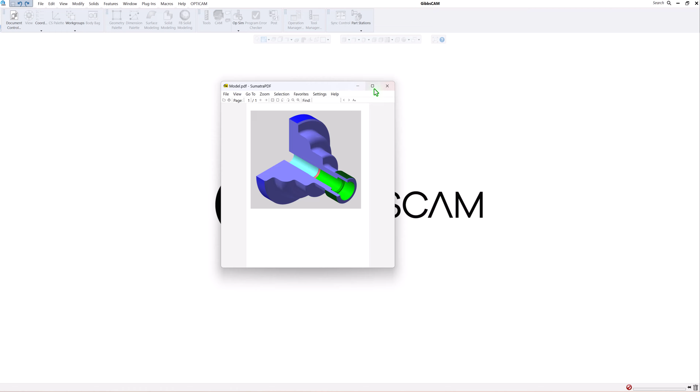This is what we're going to be machining today. Just a two-axis part with some ID turning and drilling and some threading. And this is the blueprint here for it, and you can download this off the details page on the YouTube, and to get started you can see all the dimensions in there for that.

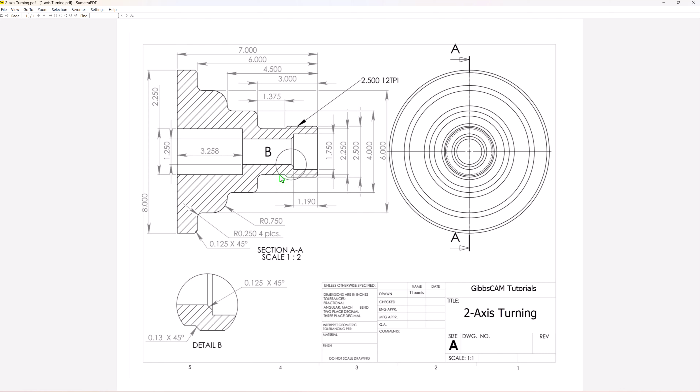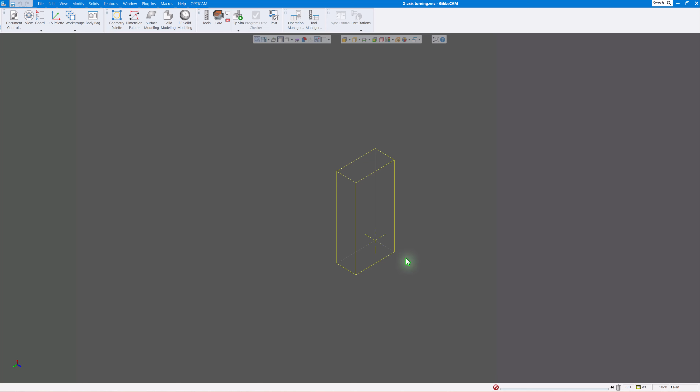So again, as we start working on this part, let's go up to File and New, and of course give it a name. We're just going to call this two-axis turning, and this should appear at the top of your page up here. Now, if the last project you did was milling, this is what you're going to see on your screen. It might be a little bit different on the square, but you're going to see a milling part here,

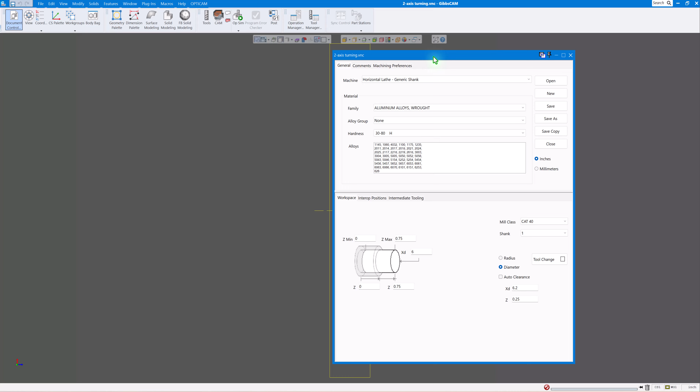which we don't want. So before you go any further, make sure you go to Document Control and click the drop-down menu. Let's scroll clear to the top, and we're looking for horizontal lathe generic shank. Okay, we'll just keep this at aluminum alloys wrought. You can see all the different menus here for material. We're going to program in inches, of course, and diameter. So make sure diameter is checked, not radius.

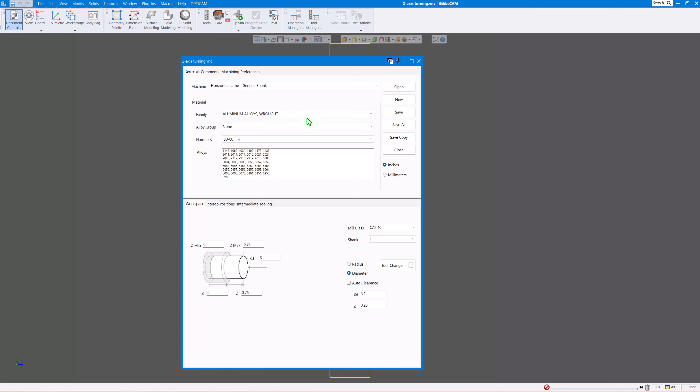And the shank we're using is a 1-inch shank. That's your stick tooling. You can see the different sizes here. The most popular is 1 inch, of course. And before we get filling too much of this out, let's take a look at our print so we can kind of do this as we're looking at the print. So now that we have the print up, we can fill out some of these blanks here and over here.

Of course, this does not have milling. This is just a two-axis turning part. So let's just click this first of all. Go down to None. Of course, 1-inch shank here. Now we have the clearance here and the Z clearance, but let's look at the part here first of all. So if we look at our print, you'll see it's 8 inches in diameter. That's the stock I want to use, so I'm going to put 8 inches in there.

And then how much material do we want the front of the face to face off? I'm going to give it 1/8 of an inch there. Okay, and our Z minimum, so basically the length of our part, you can see on the print, is 7 inches. So I'm going to say minus 7.125. I'm going to give it 1/8 of an inch on the back side as well.

Now we need to figure out how much we're going to grab onto with our jaws here, and if we look at our print, this is from 6 to 7, that's 1 inch, so I'm going to grab onto about 1/2 an inch of material, and if you figure there's still 1/8 of an inch material left on the back, 1/2 inch plus 1/8 is 0.625. So we're going to grab onto 5/8 of the part, and then we need to know how much material is sticking out past that part, so we can do a little bit of calculation here.

We know it's 7 1/8 inch overall from the back to the front there. And if we do a little bit of a calculation, we should have about 6 5/8 sticking out from the jaws to the front here. This doesn't matter too much on two-axis turning, but the visuals will be helpful on here, so we might as well get the numbers correct.

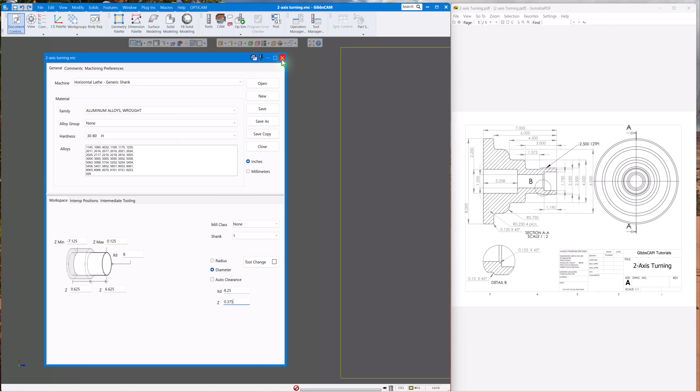And let's just do a no zoom there. And there is our part there. Now there's a couple ways to draw a part. We're going to draw this as geometry and not use a solid. The next class on the two-axis turning we'll be using a solid, and you'll see the big difference on using a solid and how much easier that is to use.

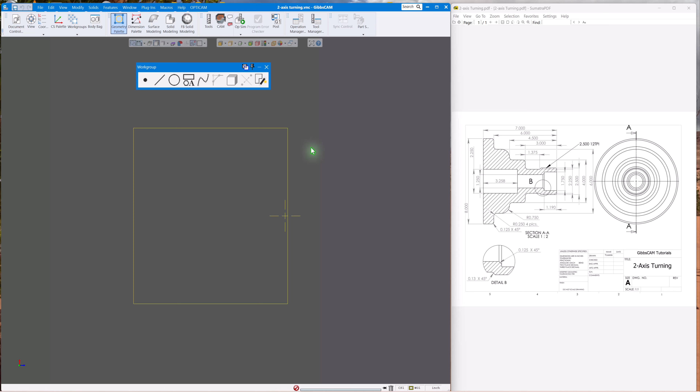So if we look at our print here, we'll kind of go through this. We're going to go bring up our geometry palette. And for the first part, we're going to use parametric programming. If you've never used parametric programming, for those that have run conversational lathes, that's usually how the shapes are drawn parametrically. So we're going to do that same thing in Gibbs.

So the first thing we want to draw is a 90-degree line at Z0. If you press enter, of course, you'll see your line appear there. So now we're going to go up from the face and counterclockwise around the part. So the next thing we're going to encounter is a chamfer there. So let's click on this little icon here and click on chamfer, and that needs to be 1/8 of an inch. Next is going to be a 180-degree line at 2.5 inches. That's where our threads are. So now we're at that point there.

So the next thing in line is going to be a 225-degree angle at Z minus 1.5 and 2.5 on the diameter. So now we're down at the angle there. So the next thing we want to do is a 180-degree line at 2.25. So far, so good. So the next thing in line here, we're going to do this little fillet here. So let's click on this drop down. So you could either choose a fillet or clockwise or counterclockwise. We'll just use a fillet there. And that needs to be 1/4 inch.

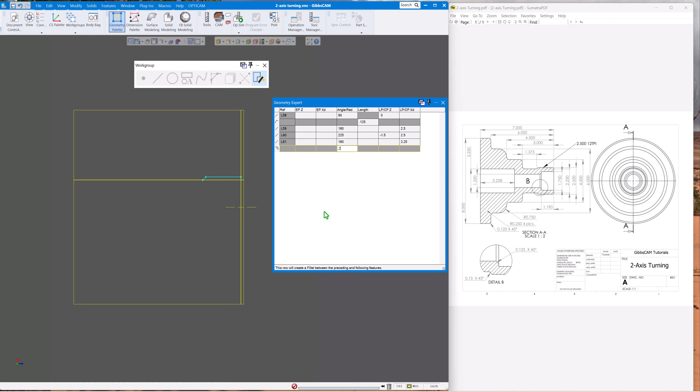Okay. So then we need a 90-degree line at -3 inches in Z. So now we'll have that going on there, and then it won't draw the fillet yet till we're up here. So let's do another fillet. And that also needs to be 1/4 inch. So we'll just press that. Next line is 180 degrees at 4 inches. So you can see our fillet has appeared now.

So the next thing beyond that, next is a counterclockwise radius there, and that needs to be 1/4 inch and -4.25 and 4.5 on the diameter there. So now we're up to that point there. So the next thing we need to do is, of course, another fillet, but this is going to be a little bit bigger, and we're going to go counterclockwise there, and that needs to be 3/4 of an inch. And that looks like it needs to be at -5.25 and 4.5 inches.

So far, so good. And next, 180-degree line at 6-inch diameter. Whoops, we needed 180-degree, not 280. Okay, 180-degree line at 6 inches. So next we have another, we're up to this point now, 6 inches. We need another 1/4 inch fillet in there. So let's just choose a fillet there. That needs to be 1/4 inch.

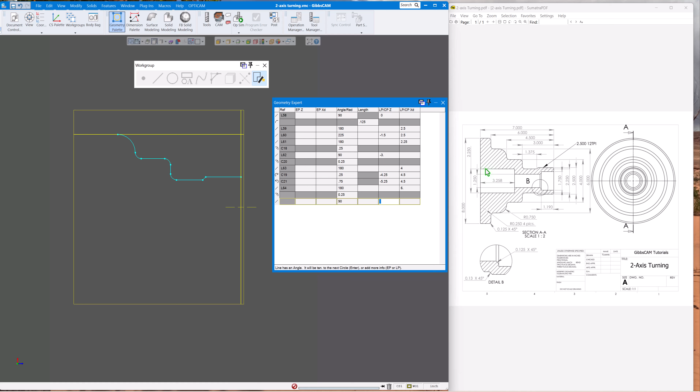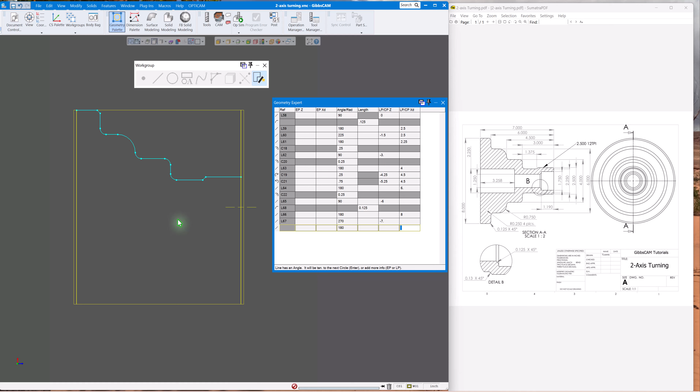And then we need to go from there, we need to go up in the Z. Get the Z first, then up. So that'll be at 90 and -6 in Z, which needs to be 270 at, are we, -7 inches. So we have our backside there. We're starting to now do the backside. So now we need to start to do the ID of the part, which is going to be 1.25 inches. And let's see where we're at, 1.25 inches.

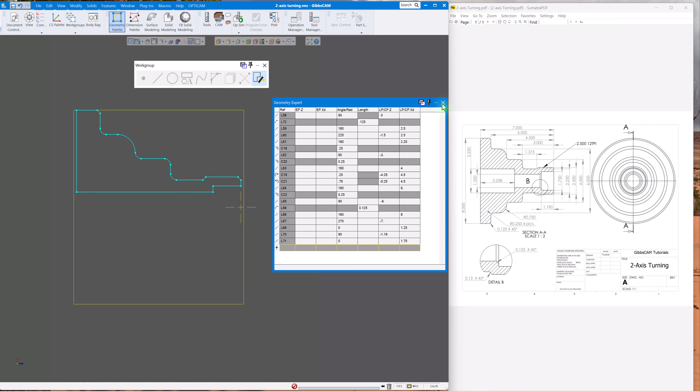So basically 0 degrees and 1.25 inch diameter there. Okay, now we need to put in the Z, which is going to be at 90 degrees and -1.19 on the Z. Okay, next is going to be 0 at 1 3/4. Okay, so now we have our shape almost drawn there. Now we need to connect up here. So to do that, just click on this last one here and click this connect button there. And if you look at your print and the part, everything looks like it's supposed to.

It looks like we might have missed a chamfer on there, so let's go in and fix that. So even if you have that done, you can go back into here and put in the correct value, but on here we could just click on this corner and click the chamfer button, type in 1/8 of an inch, and there we have our chamfer on there. I think everything else there looks good. We have our chamfer, radius, radius, radius, radius, kind of a chamfer there, chamfer in the front, nothing there.

So everything there looks good. Now one thing you can do, let's save this before we go any further. You can always open Geometry Palette again, and if you want to check your part or if you made a mistake, you can click this Parametric, or Gibbs calls it Geometry Expert, it's Parametric. And if you just double click your part, you'll see it fills in all the blanks of everything there.

So if you messed up on something, maybe you messed up here, let's just see, if you click on it, it highlights it. And if I want to change it to say 0.300, you can see it changes it automatically there, but we need to go back to 1/4 inch, so make sure that's correct. But you can check anything there for diameters, fillets, whatever you need to see if you messed up there, and you can change it here.

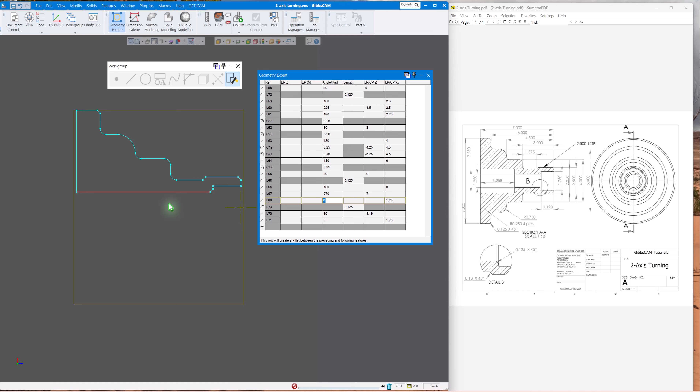Okay, so that's one way of drawing the part. We're going to show you a second way now, using geometry and not using parametric. So in order to do that, we're not using parametric, of course. So I'm just going to hold the Shift key down and delete all the geometry there. So now we're going to draw it using just lines, arcs, circles, things like that. So first thing I want to do is pick line command, and from axis, and vertical lines.

So the first thing I'm going to put in is the line at Z0. Make sure you pick the double line so it stays in that menu. So if you look at your print, our next Z is -3 inches. Then -4.5, -6, -7, and that should be all the lines except for the line we need to draw 1 3/8 down to here. So get out of this menu, pick line again, and this time parallel off of this one, 1 3/8. Make sure you pick this one closest to the front.

So now we have all our vertical lines drawn. We should have 1, 2, 3, 4, 5, 6. We have 1, 2, 3, 4, 5, and 6 there. Okay, so now let's draw some horizontal lines. So again, line and horizontal. Let's pick the horizontal tab. And the first thing you want to do is 2.5 inches. We're just going to draw the outside first, so that'll make it a little easier. Make sure you pick the double lines there.

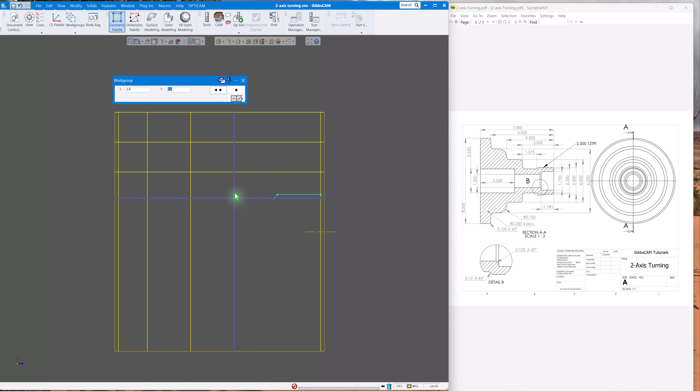So let's click there to there, space bar, there to there, space bar, next, space bar, next. We're just gonna basically walk around the part there. And the last two there. Okay, good. All right, now let's draw the ID before we do the chamfers or anything else there. So let's start the ID. That'll reduce how many lines we have, so it's a little less confusing.

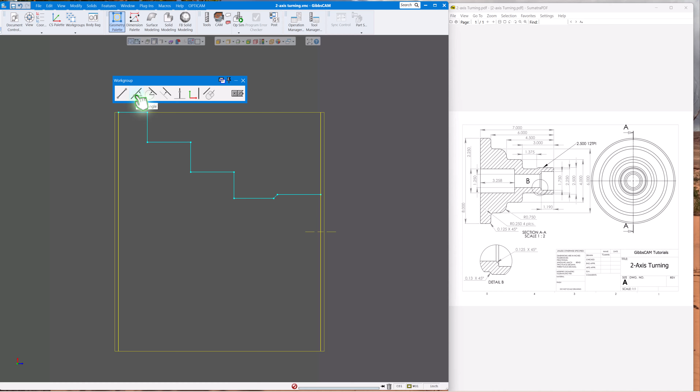So again, let's pick the line, and from axis there, and we'll do horizontal lines first. So the first one I need to do, let's start at the front, is 1 3/4. Press the double lines to make sure you stay there. So there's 1 3/4. Next one's going to be 1 1/4.

And the last one, 2 1/4. So now we have our 3 lines. Now let's draw some vertical lines. Okay, the first one I want to draw is, let's see, we don't have dimension from the front, but we have the dimension from the back. So let's go back, pick line and parallel this time. Click this line at -7 inches and we need to go 3.238, and we'll just draw one line there. And of course you want to pick this one.

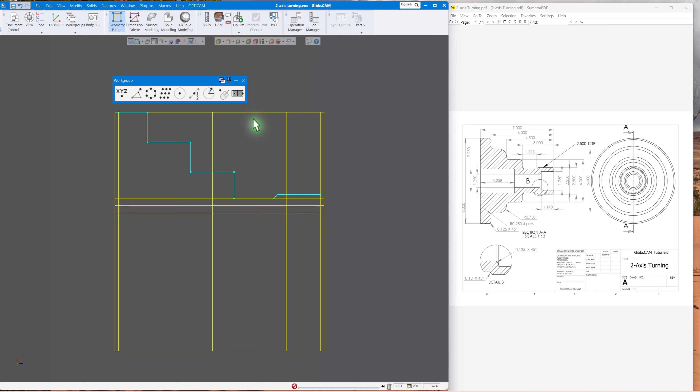The next one back is 1.19, so we could do either line parallel or axis. We'll just do line parallel again. I guess we could have stayed in that menu. And 1.19, and there's that one. Now we can start connecting the ID up. So let's just pick the point command again. Don't pick any menu. Pick this line here and this one right here, and pick the double points.

There to there, space bar. There to there, space bar. There to there, space bar. There to there, space bar. Last one, there to there. Okay, so now we have our ID drawn, pretty much everything, except for the fillets and chamfers. So let's get out of this menu here. And it looks like we have 1, 2, 3. We actually have this one drawn in, so we already have 1, 2, and 3 right there. I think that's all of them. Yep, so let's just pick the points there.

So this point, hold the control down. Okay, and this point here, and this point here, and pick on this little icon here, which is chamfers. Make sure you're on chamfers. And we want 1/8 of an inch. And we'll just pick, yeah, that's all the chamfers. So let's stay in this menu anyway. So let's do that. So now we have our chamfers there.

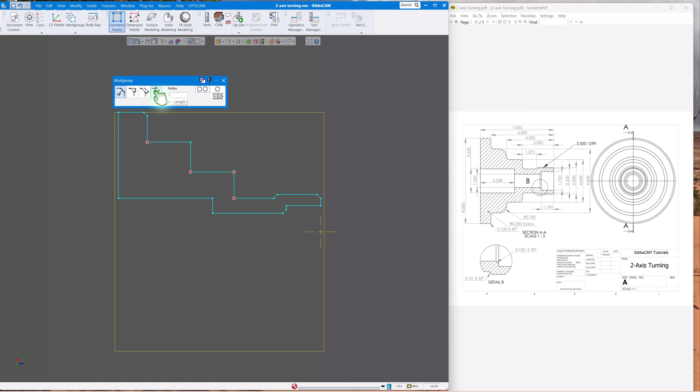So now we need to go to fillets there. So let's click on fillets while we have this open. And this needs to be 1/4 inch. Let's do the 1/4 inch ones first. So 1/4 inch, 1/4 inch, 1/4 inch, 1/4 inch, and I think that's everything. So make sure you're on fillets. This time 1/4 inch. Just press enter and you'll see those all appear there.

Now the last one we need to draw is this 3/4. So let's just pick on the corner there and type in 3/4. You can see it's not giving us a radius in there. And so you're probably wondering, why isn't it giving us a radius? I picked the right corner there. That's because this radius, of course, can be tangent to here. There's enough room, but this is smaller than 3/4 of an inch.

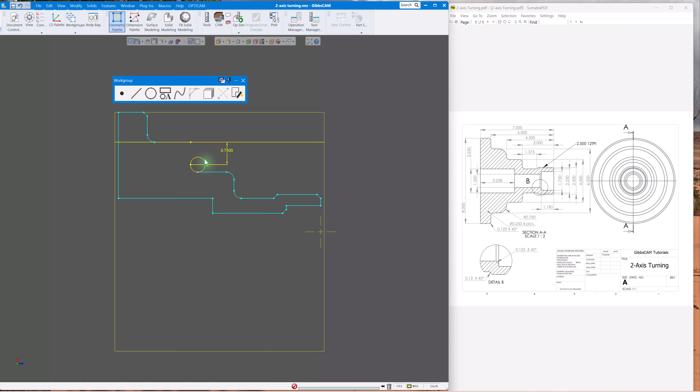So if we were to dimension that, you would see why it is. So if I dimension that, you'll see it's exactly 3/4 of an inch there to there. So you can't have a radius attached to this line here and still be 3/4 of an inch. So we need to delete this line here. So we'll get rid of that. Let's turn off our dimensions for the moment. And we can get rid of this point here. It's just a point in space now that we really don't need.

Okay, now we need to draw a circle. And you don't need to pick any menu. Gibbs knows what you want to do, but we would know we want it to be tangent to this circle and tangent to that line. Then it asks for a radius, and that'll be 3/4. It gives you all these choices of tangency. Select this one, of course, and click OK.

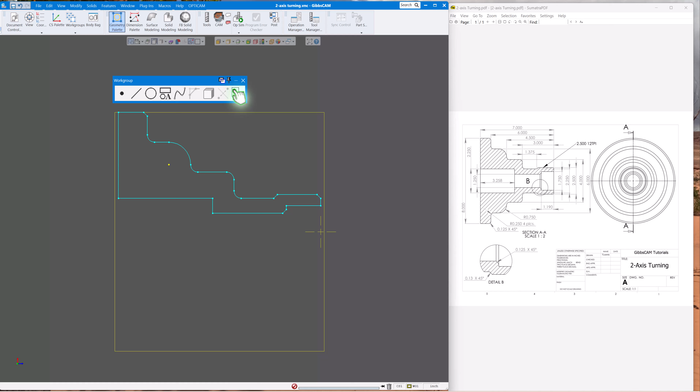Now our part is fully drawn using just geometry, lines, arcs, circles, and that. I think we have everything drawn in there. Everything looks pretty good. Chamfers, fillets, everything looks good. So that's another way to draw it versus parametric. The next class will show you how to bring this geometry up using a solid model, which you'll see like in 5 mouse clicks, you'll have all the geometry. So the advantage of using solid models, but this is just learning how to draw with geometry.

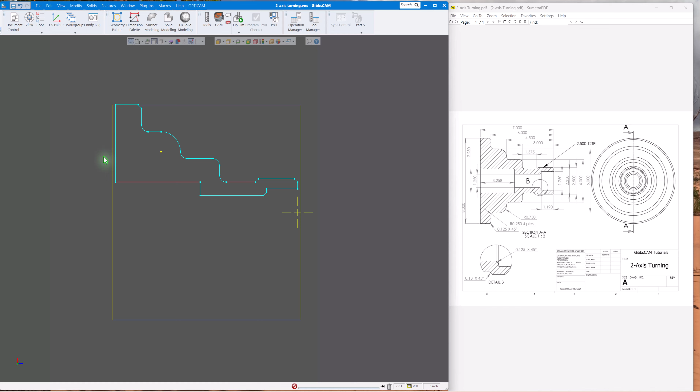So I remove the print. Now we're going to create the tools and start machining this part. So I'm going to bring in the tool list here that I've already created there. We'll just go to tool list, browse, pick the tool list for this, and it's going to load those up, and then we'll go through all the tools.

So the first tool I want to use, standard like CNMG, 1/2 inch inscribed circle, tool holder sitting in the turret this direction, offset number 1, and spindle forward. So that means the insert is facing to the back of the machine, so it'll throw the chips to the back. You can see if I go reverse, you can see the insert's facing up now, which will throw your chips to the operator, which you usually don't want to do. So let's make sure that's back on forward. And I usually give it a name, main spindle, rough, and what I'm doing with that.

So when it's out on the control, the operator, whoever's running it, can look at the text and see what that tool is supposed to be doing. Okay, everything else there looks pretty good.

Okay, next tool, it's going to be a 55 degree there. We're going to use this for somewhat finishing and somewhat roughing as well. Even though I have finish face and OD, we're going to use a different tool, and I'll show you why as we get going there. But same location, 1/2 inch IC, tool holder, and 5 degree face relief.

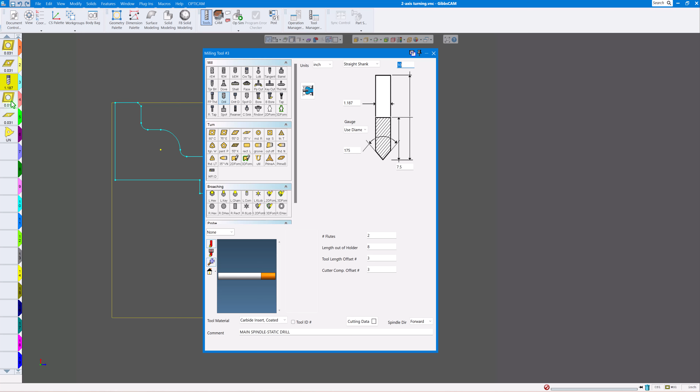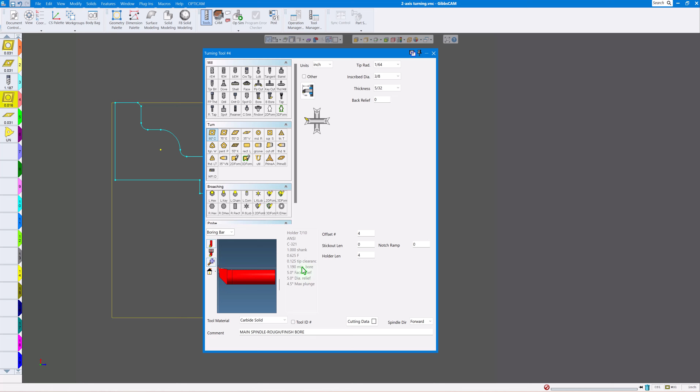Next tool is going to be the boring bar. You can scroll down in here and look at the different shanks. Now if the shank is bigger, or the minimum bore is bigger than your ID, then Gibbs is not going to let it go in. So make sure you choose that correctly. Look at the shank diameter, look at the minimum bore to make sure that's going to fit. Otherwise you won't get a tool path on there.

So the next tool, tool number 5, is going to be a 35 degree. This is going to be our actual finish tool to finish the face and the OD. And last tool, just a threading tool. Choose the style you want and the threads per inch if you want. If this isn't a form tool, you could of course choose just a V tool. If you just wanted it to be any angle you want on there, you could choose a V tool instead, down right here. But this is going to be a kind of a form tool.

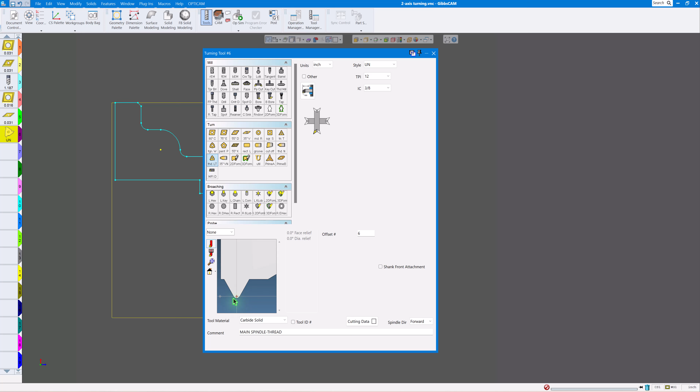So when you have form tools, it asks you the actual thread, so it can form that a little bit better. Whoops, that needs to be UN, sorry. And that's 12 threads per inch. Let's go back to that, make sure I have it correct. Now you'll notice on here, if I zoom this up, this little arrow right here means this is basically where you're going to touch off the presetter for your part. Normally I like to start right here on this little X here. So I touch the edge of the insert off your presetter so it sets the distance in Z here.

And if I look at the code for the machine, if I'm machining or threading up to a shoulder and I don't want that shoulder to hit the wall, I know that I programmed it from this edge here. So if my wall is -1 inch and I'm going at -0.990, I know this edge of the insert is not going to hit the wall. So you can choose either here or here. I usually like to touch off here.

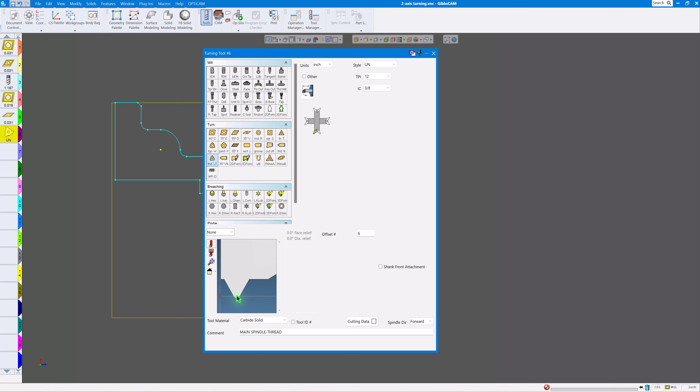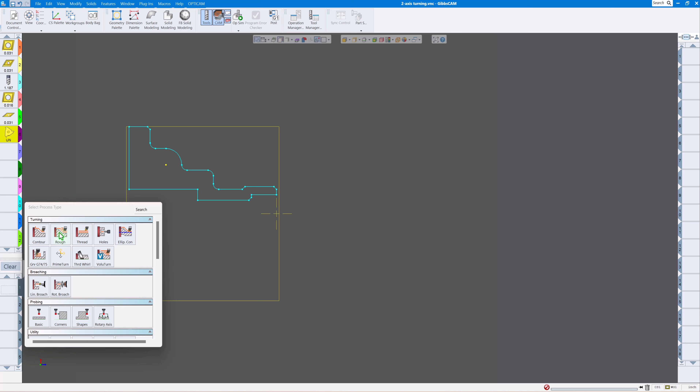Okay, so the first thing I want to do is, of course, face off the part. Let's turn on our CAM, and we're going to rough this out because I don't want to take 1/8 of an inch all in one cut. So let's bring this up here, and we want to do a roughing pass with that tool number 1. And we're going to do front face. There's our rapid 2 there. We're going to go 50 thou depth of cut. Finish stock, I'm going to leave 0, and Z stock, I'm going to leave that at 3 thou.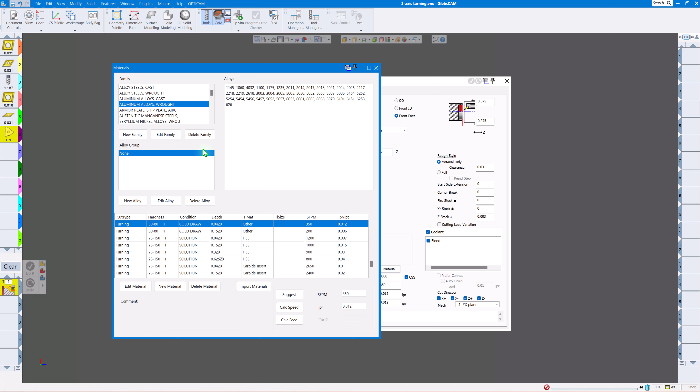And depending on the material you choose, you can choose entry and contour feed and surface feet per minute. It'll fill in the blanks. If you don't like those, you can always go to material and edit these, and that'll be saved in your database for future use. I think everything there looks good. We want a canned cycle though. I want like a G72, and we have to make sure we're on full, or otherwise it won't let us do prefer canned. And there's prefer canned. Everything else there looks pretty good.

Okay, let's close this. One thing I might do is put a point. Let's just draw a point at 0, 0. And we'll show you why here. So let's click on the front face here and OD there. And if you want to go to a specific OD, you can right click and say move it to a certain diameter there. Okay, and we're going to go down in the Z, cut on the outside, and let's put the black round pointer right at X0Z0, and it'll snap to it. That's why I put a point there, so it makes it a little easier. Click on do it, and now we have our facing operation.

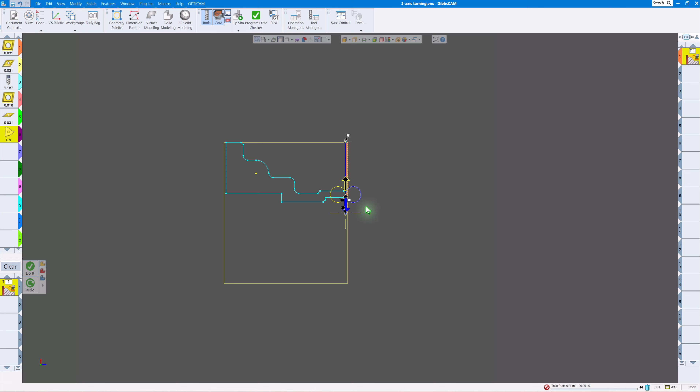So the next thing I want to do is the OD of the part. Cut the OD, so I'm going to use the same tool, same process. I'm just not doing a facing operation. I'm doing OD. We're going to go 1/8 of an inch.

That's XR, so that's radius, so 1/4 inch diameter total. And this is our rapid move, and we're now at 8.25 inches. That may have been from a previous part. Our part is going to be 8 inches. That's where the actual material is. And again, we want to leave a little bit of stock, so I'm going to leave 10 thou on the XR. That's 20 thou total on the ODs, and 3 thou on all the faces there on the Z. Everything there looks pretty good.

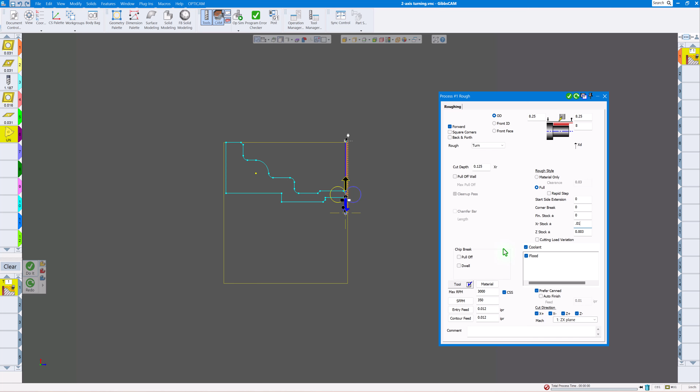Now, one thing I'm going to show you as I do this, let me zoom this up a little bit. Okay, I'm going to click on the chamfer there, and you can either drag it off the part, right click, or say move it off the part 100 thou. You could do that if you want. That'll move it there. Now, the best way to get the black square one over to the last thing you want to cut is just to do Control-Shift and put it there.

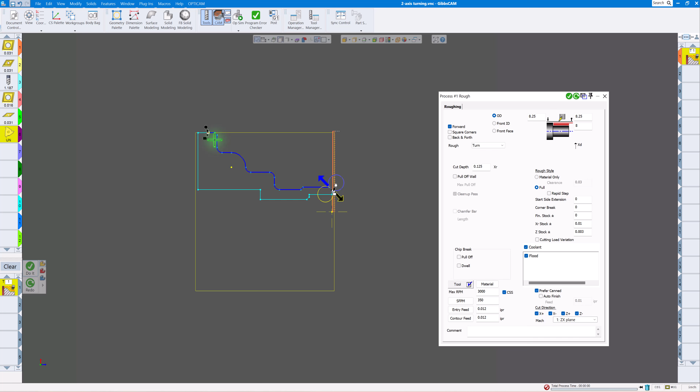Now, remember, our jaws are up here at 5/8, so what I might do before I do this is put a point so I can snap to it, so I don't go past that to hit the jaws. So I'm going to do point and point at an angle. Let's turn off cam for just a minute, and I want to go from here, distance 1/2 inch, and it'll be 0 degrees. So there's where our jaws are actually at. Remember, we're grabbing onto the part 5/8 of an inch, including the 1/8 inch back there, so that's 1/2 inch from there.

Okay, let's turn our cam back on, start over again there, drag it off the part, Control-Shift this line. I maybe should have put another little point ahead of that just to make sure, but I'm going to click on about right there. Actually, I could stay closer to here if I want, because this is already a size. Then click Do It.

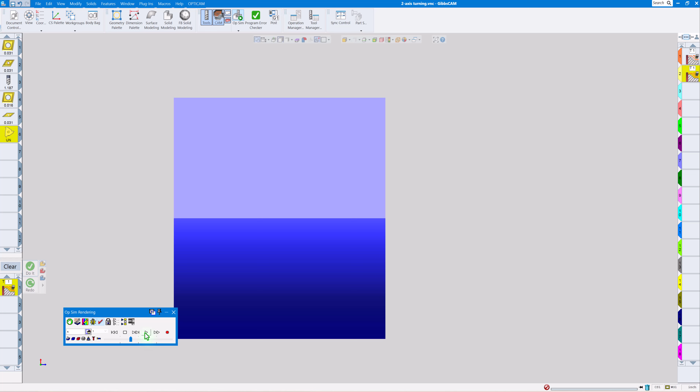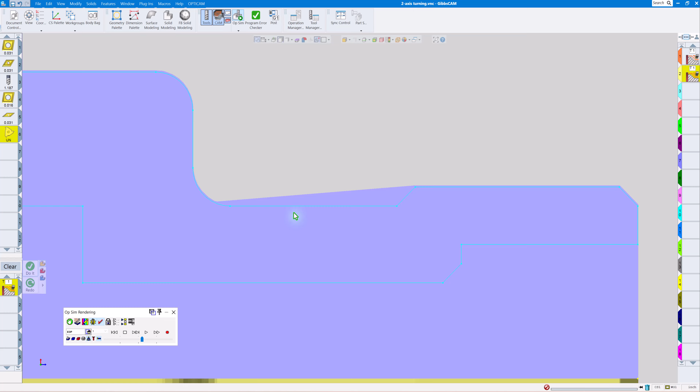Now, let's run the rendering on this to see what we've done so far. So we'll slow this down. So we're facing this off, and we're cutting the OD. So far, so good. Okay, the only problem that I have here, let me turn on the geometry, is this section right here. Most controls will not let you do a canned cycle if you're going from small to big, then back down to small. You usually have an alarm on your machine saying it can't do that. So you could machine this longhand, but I like to use canned cycles because it's much more efficient. So let's fix this.

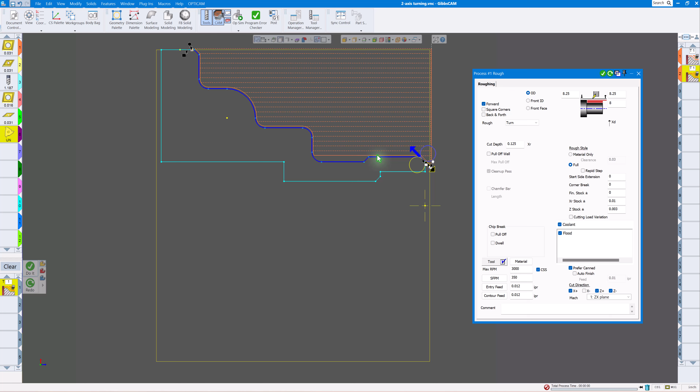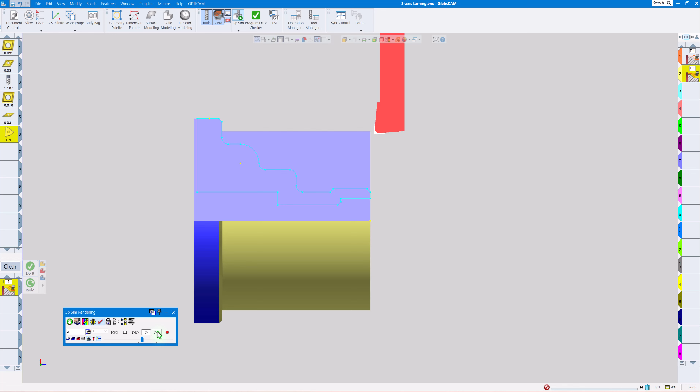So let's turn off that, and let's open up our process again. And this time we're going to tell Gibbs, don't do any more X minus moves once you've gone up. And then, of course, we're on operation number 2, so click on Redo. Now you'll see that doesn't dip down into there. As before, Gibbs would let it dip down in there because it stays, I think, 2 degrees away from the insert, so it'll allow you to go down there if you want to use longhand code, but I like canned cycles. It works much better. So let's render that again. And you'll see that looks pretty good there now.

Okay, so before we finish roughing this out and finish it, I want to at least rough out the ID because of stress relieving. So next, clear this out, and let's bring up a drilling process. This is going to be, of course, static drill, 1.187 drill. So 1/4 inch away, let's see what we have here on our document control. I have actually 3/8 there, so I'm going to change this so everything's equal. 3/8 there. We've already faced it almost off. You could put in 3 thou there, but it's really not going to make much difference.

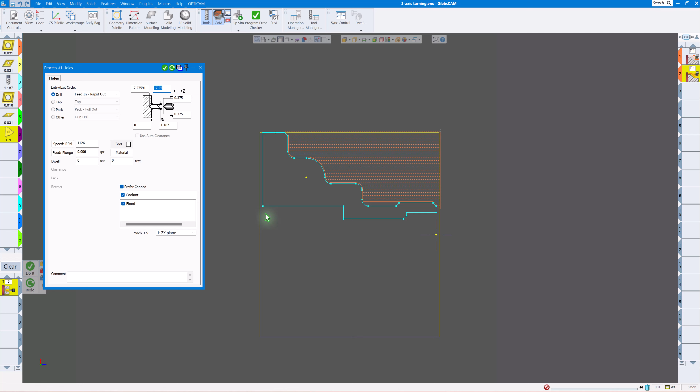So now, let me move the part over, and let's highlight the full diameter of the drill and hold the Alt key down and click on the last thing you want to cut, which is -7 inches. But remember, we have an 1/8 of an inch past there, so we'll put -7.2. That'll get it clear past our part there. And of course, feed in, rapid out, depending on if you have high pressure coolant or not. That's up to you. If you want to peck it, that's totally up to you as well. Then you should do your feed and plunge.

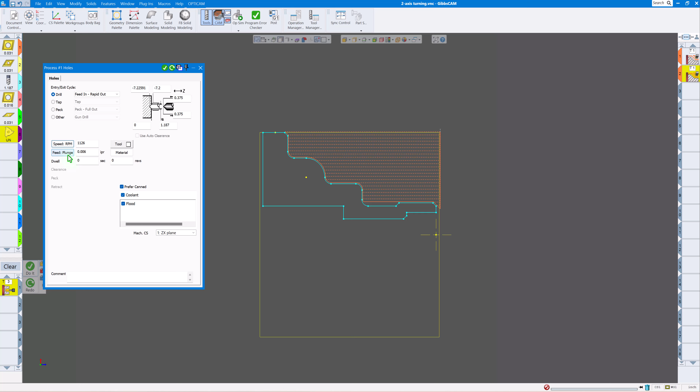And you don't need to pick any geometry because this is a static tool, so it knows it needs to be in the center anyway. So just click on Do It. Now we have our hole drilled in our part. Okay, almost to size. Next, clear this out.

Bring in a roughing process again with our boring bar. This time we're going to do a front ID, and we already drilled the hole 1.187. That's where we want it to rapid to and rapid to when we're done. And there's the material that the drill left over, starting 1.187. We're going to cut this down to probably 80 thou per rev. Everything else there we're going to leave the same. A little bit of stock, feed rate, make sure all these are on. Prefer canned.

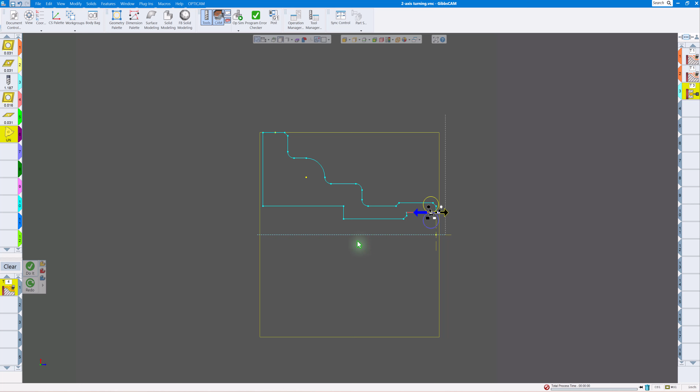Okay, let's start here. Let's go this direction. Let's just right click the white round one and say move it off the part, 100 thou. Okay. All right, let's hold Control Shift. Sorry, I missed that. Let's do that again. One more time. Okay, let's do 0.1 again. All right, now we're good here. Okay, now Control Shift. Click on the last line there you want to cut. And we'll go a little bit past there. And click on Do It, and there's our roughing.

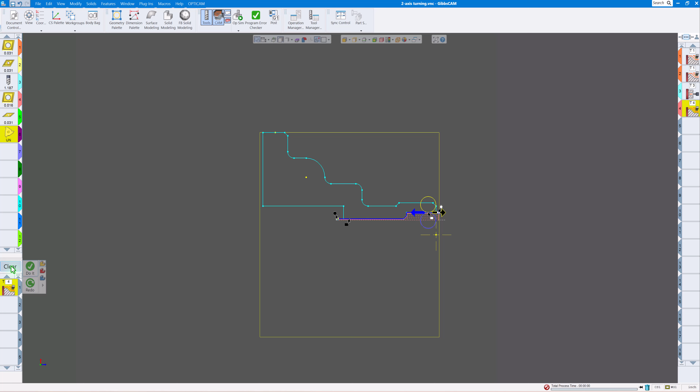Okay, now we're basically ready to finish. We've cut most of the material off, so we shouldn't have too much stress relieving. So I'm going to clear this out and just bring in a contour. We're not going to use multiple process, otherwise we could have done this with one shot, but we're going to do this since this is the first part, one at a time.

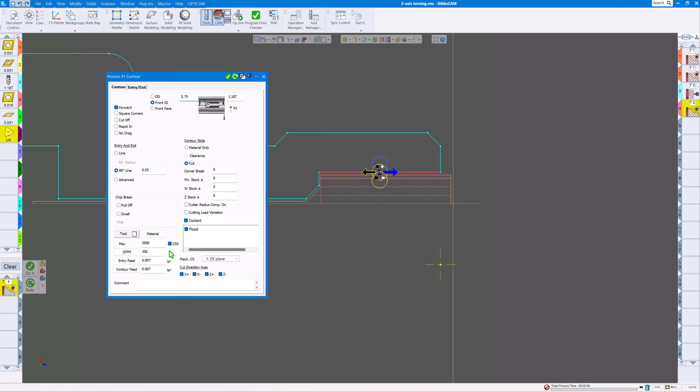So again, front ID, this is the same tool, 1.187 is where we want to rapid it to, but I think I want to get a little bit closer to the part there. So I'm going to highlight this button here, hold the Alt key down, click on right there. You can see it's 1 3/4, so I'm going to start right there instead of going to 1.187 and then feeding up there. So you can get closer if you want, or you can let it feed up however you'd like. We're cutting everything to size there.

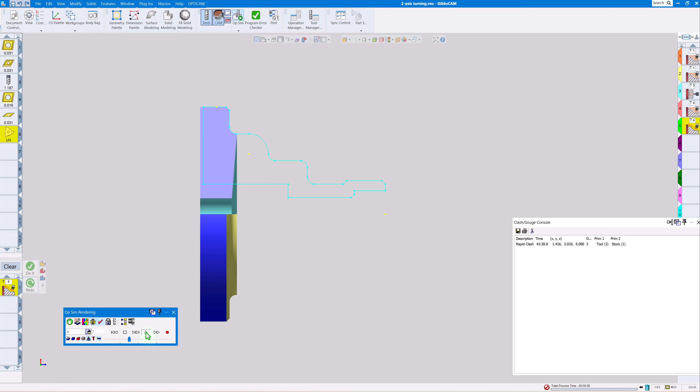Everything looks good there. Okay, again, we're going to start off our part a little bit this direction. Control Shift, a little bit past there, and we'll click on Do It. That'll be our finish pass. Make sure you click on the ID, which I forgot to do. Click Redo. There's our finish pass. Okay, so far so good. Let's look and see where we're at. Okay, let's rewind there so we get everything correct there. Okay, drill, rough, and finish.

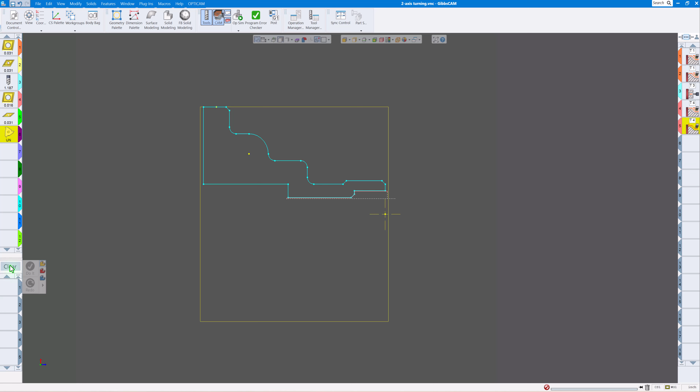Okay, everything's good there. So now we need to kind of rough out the outside a little bit of this groove, and then we'll do finish on there. So let's clear this out, do a roughing process with that 80 degree. Actually, we could use the 55 degree instead here just to rough it out. That'll be fine. OD this time. Zoom this up just a little bit.

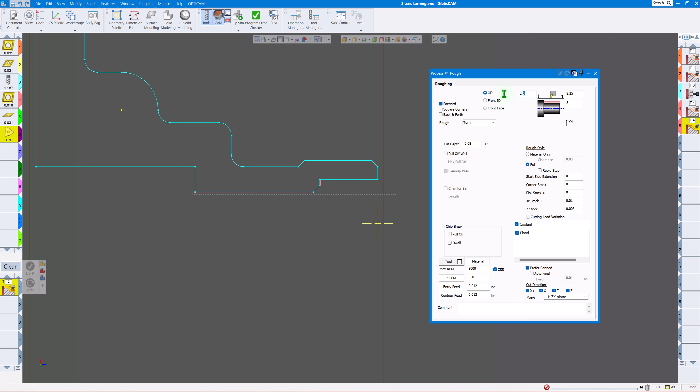We don't want to rapid it to 8 1/4 clear up to there, so let's just highlight this button, hold the Alt key down, click on this line there. You can see it's 2 1/2. I don't want to rapid it to there, so I'm going to go 2 5/8 and 2 5/8 when we're done there. And the material, highlight that, Alt. The material left over is starting at 2 1/2 inches.

This is 55 degrees, so I'm going to go 35 thousandths depth of cut. We'll just do finish stocks, leave stock everywhere. We'll do 5 thou everywhere there. Do our entry and exit feed there. 12 is a little much. Let's go down to 8 thou. Okay, everything there looks pretty good. We can't really use a canned cycle in that. Let's go material only and tell the tool to stay away by 50 thou.

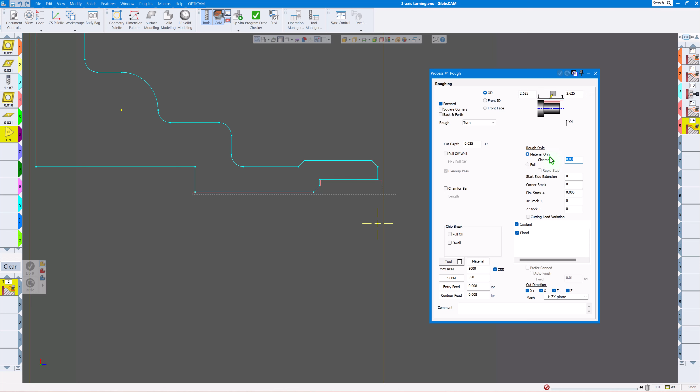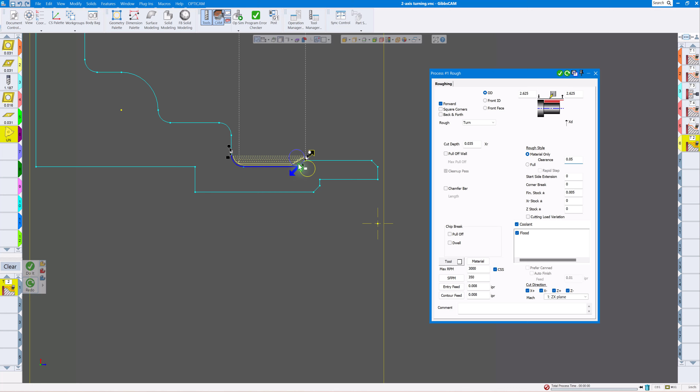So I'm going to click on this chamfer here, bring the tool out just a little bit to the starting point, hold the Control Shift down. Let's just end on this line here. Since we have material only, it's only going to cut where material is left over. So then click on Do It. And there's our path there to cut that. Now you'll see when I render this why we chose the 35 degree to finish. So let's finish that. We need to rewind to make sure we get everything correct.

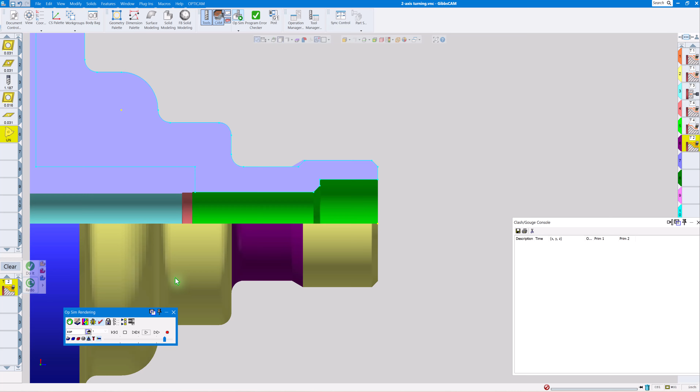Now you can see the 55 degree is not going to clear this here. So that's why we need to use the 35 degree to finish. And this isn't too much there, so we'll just finish with that one. If you wanted, you could have roughed it out with 35 degrees instead of 55. That's, of course, totally up to you.

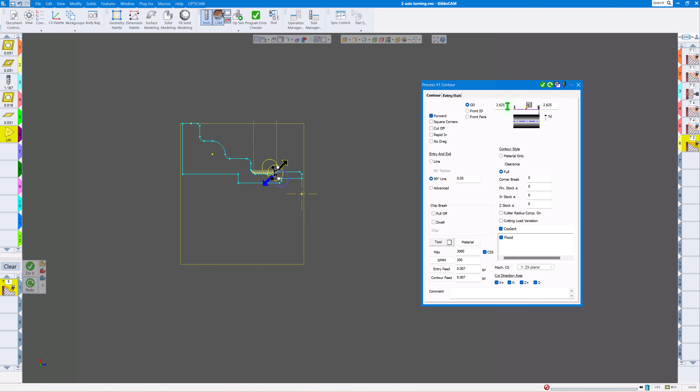Clear this out, do a contour with that 35 degree. We're going to do OD, but I don't want to start at 2 5/8. So basically I want to start a little bit underneath here. So I'm going to highlight this, of course, hold down the Alt key, click on right there, and you can see that's 1 3/4. I'm going to go just a little bit below that, so I'm going to say maybe 1 5/8. And of course, when we're done, I want to go to 8 1/4.

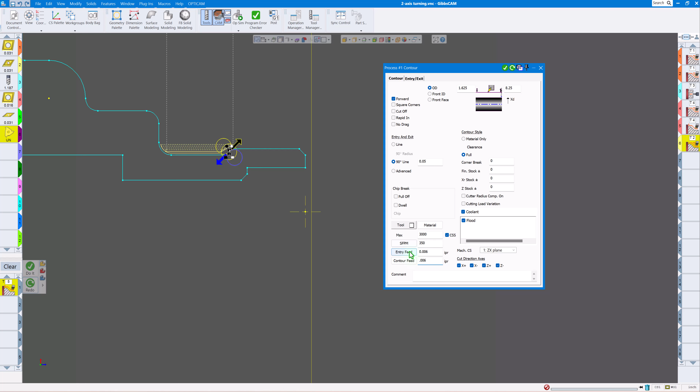I think I put that on the clearance plane before. And we'll do a little bit of a 90-degree line, 50 thou coming in. And we're going to basically back face this. So I'm going to say 6 thou on there. And you can type in your entry and contour feed or use the material only. That's up to you. Let's click on the face there.

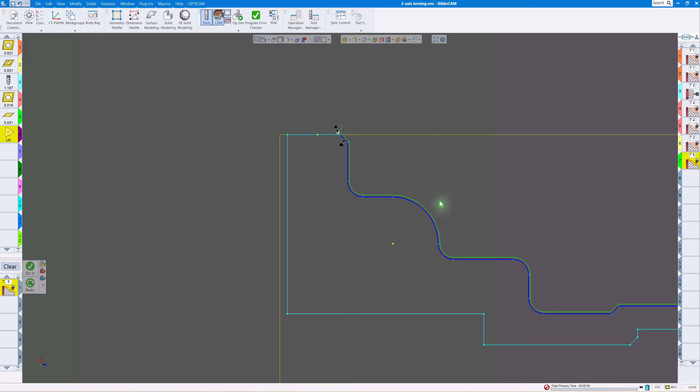And we're going to start a little bit below there. Go this direction. Hold the Control Shift down. Click on the last line there. Actually, I probably want to end on the chamfer there. And a little bit past there. And we'll click on Do It. Now we should have our finished shape there, so let's render this. And there we go. And it matches our geometry perfectly along with this angle there.

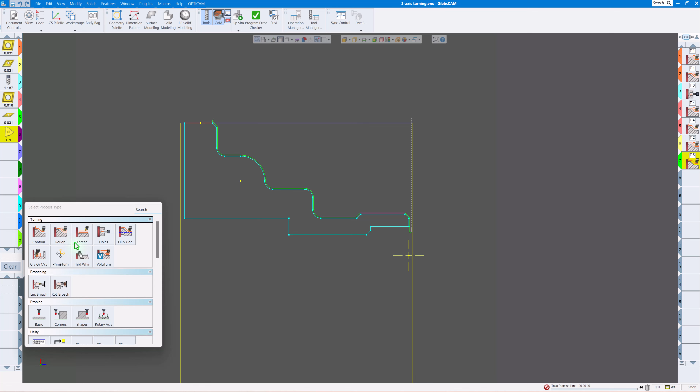So the last thing we need to really do is our threading here. So let's clear this out. Choose a threading process with that form tool. Okay, we're going to do it from parameters there. Constant threads per inch, 12. That's the pitch.

This is 2.5 inches, so I'm going to stay a little bit above that, 2 3/4. I'm going to stay 1/4 inch away from the end. Most machine tool manufacturers recommend at least 2 threads in front of the part before you engage the threading cycle. So 1/4 inch should be plenty there. And of course, this dimension here, I'll just put 0 there. Highlight it again, and I want to go right about to there. It's good. So that's 1 5/8 back.

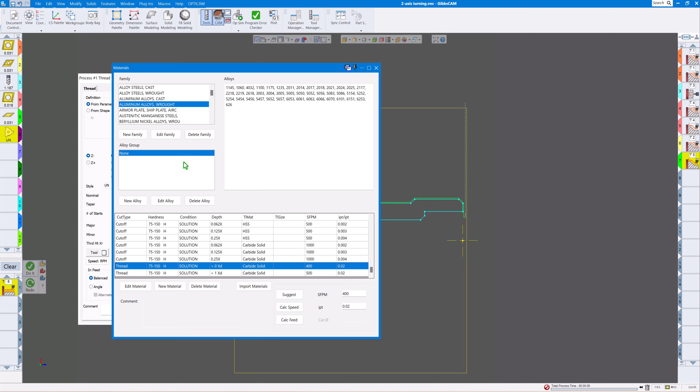We're doing a Z minus, so from the right to the left. OD, 2.5 inch, just a single start. So this is a single entry thread. It'll figure out the major, minor diameter. You can put in whatever speed, RPM you want, or use the material only if you want it to calculate for you automatically. Now you have a choice of balanced and angle. I'm not a real fan of the angle there because sometimes I see it leave steps in there depending on your machine tool. So I like to go balanced and go right in the middle there. That seems to work pretty good.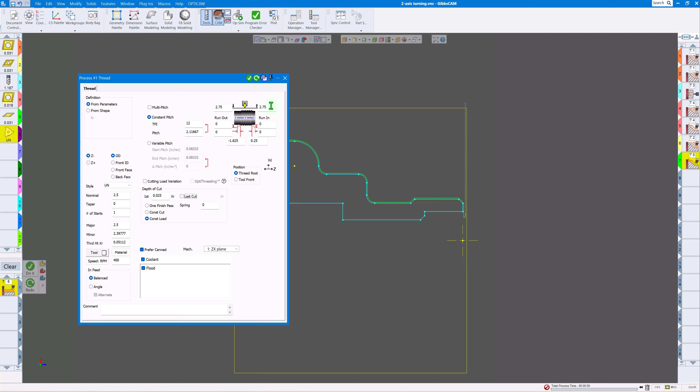So depth of cut, this is the first cut here. I have 25 thou. And last cut, we'll just uncheck that. I want to do constant load there. If you want to do a spring pass, you could put something in there if you'd like. And canned cycle, so everything else looks really good. So let's just click on Do It. You don't need to select any geometry because Gibbs already knows what you want to do. And let's click on Play.

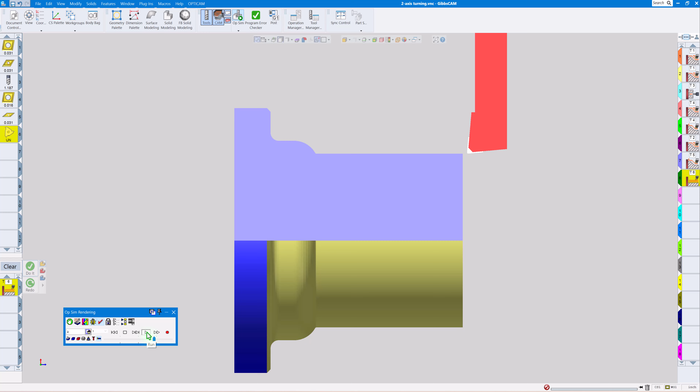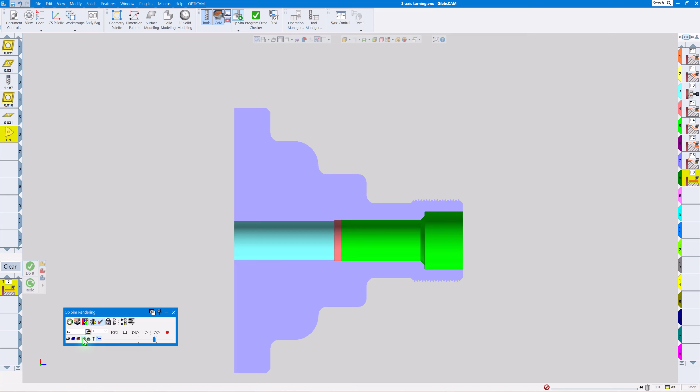Let's rewind everything there back right from the beginning. Roughing, finish. Then threading there. Screen may flash a little bit just because I'm recording there. But that's your finished part there. Of course, you can do a full half cutaway, full OD there. And again, 1/4 cutaway, which is what we had, and half and back to full.

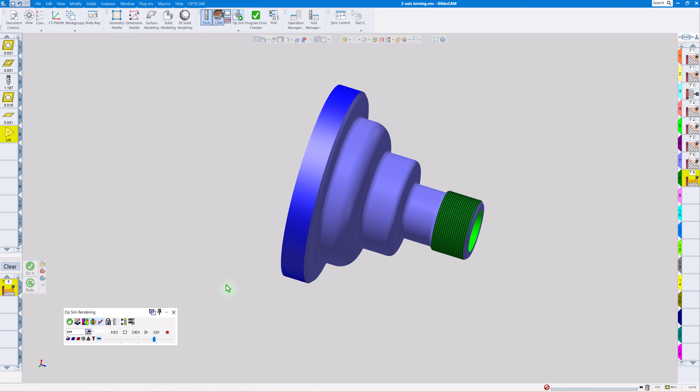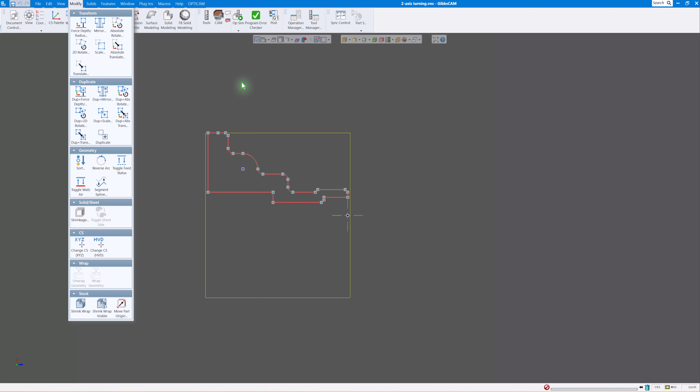Now we don't want to go too long on this, so we're not going to do the back side of this part, but you can easily do that if you like just by doing a save, and then you could do a save as and maybe say op number 2. So basically all you need to do is grab your part once you've changed the name and just do mirror or rotate, either one you'd like to do. You could mirror it, and then you'll have all the geometry ready to go, and then just do the back side of there.

So anyway, this is how you do the 2-axis turning using parametric or geometry. And the next one will be going off of a solid model, and you'll see the difference there. So that'll be in the next class.